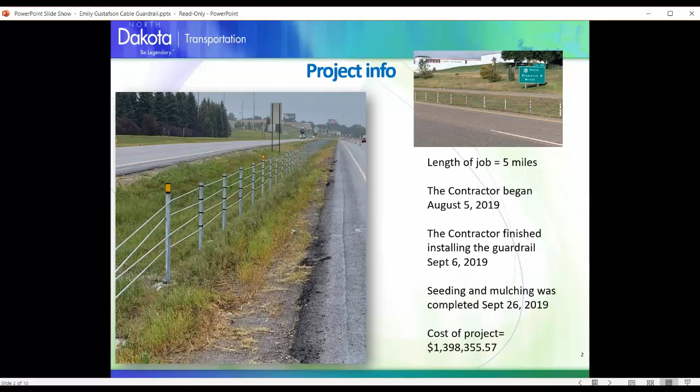In and out. There was a 1-lane closure on the interstate for that month. So, minimal impact to the public. They were still able to go 60, but it was a 1-lane closure. And it cost about 1.4 million.

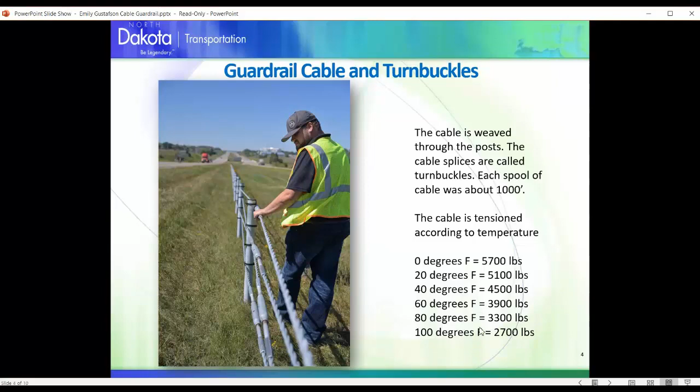Each spool of cable was about 1,000 feet. So every 1,000 feet we have these turnbuckles. And then the cable is tensioned according to the temperature outside. So it was August, it was 90-ish. So around 3,000 pounds is where we were tensioning that cable.

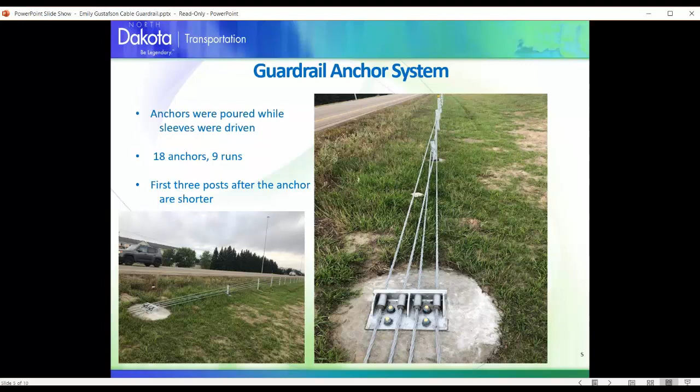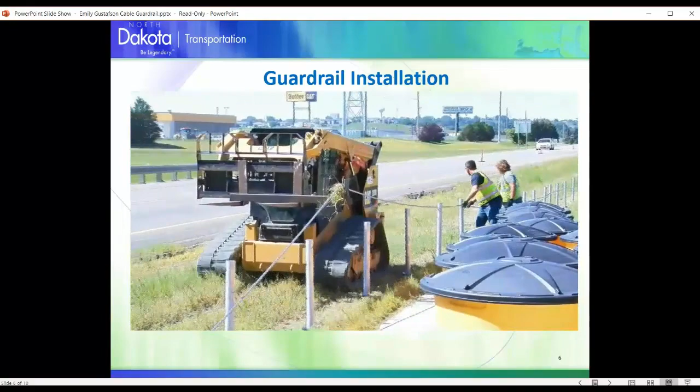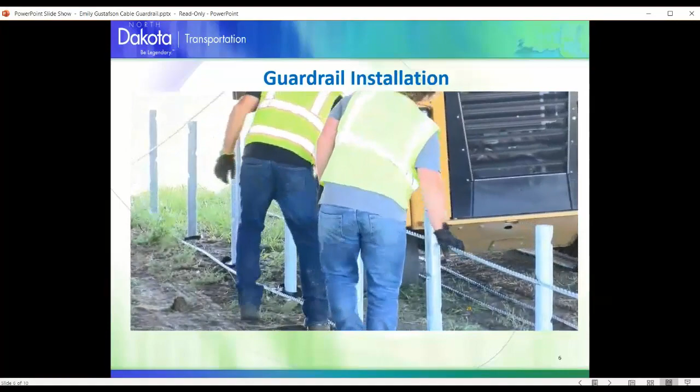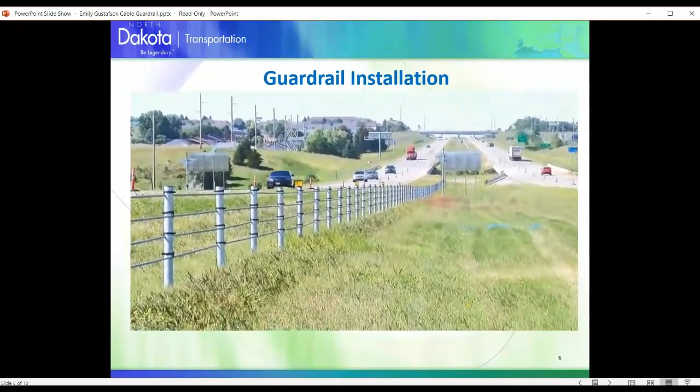This is a video. There's no audio. It's just a video that shows them stringing the cable. Okay, and then it just kind of showed a final view of the finished product.

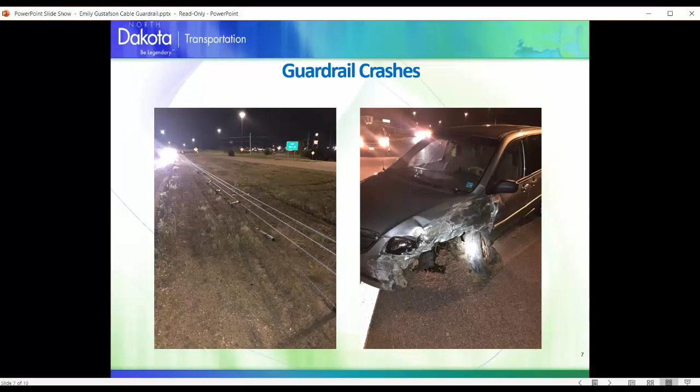The cable keeps its tension really well. It deflects a lot and then it goes back to its shape and it keeps its tension really well. We went out the next day. We have a trailer with replacement parts on hand all the time, and we had some guidance on what to do. So this was our first time going out and fixing a damaged section. So maintenance, we went out there and it probably took, I don't know, maybe like an hour and a half to fix those 19 posts.

You're never supposed to cut the cable unless it's a life-threatening situation. And if you do have to cut the cable, you try to cut at the turnbuckles so that it's easier for the splice. And so, like I said, it was pretty painless to fix it.

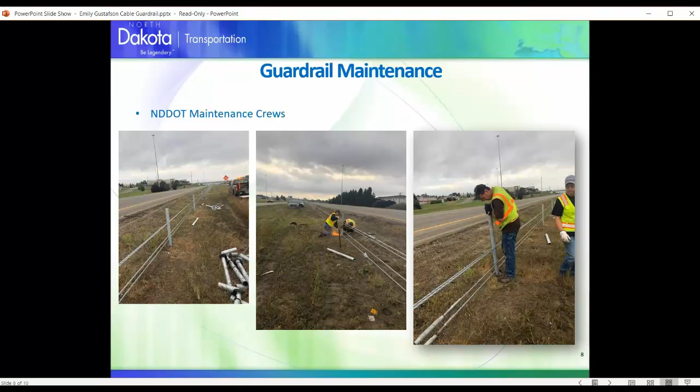I shouldn't say us because I was just taking pictures and not helping, but maintenance guys do a really good job. They're out there right away after a hit, I mean, within a day, and when they're done, you really can't tell that anything happened there. So they do a great job.

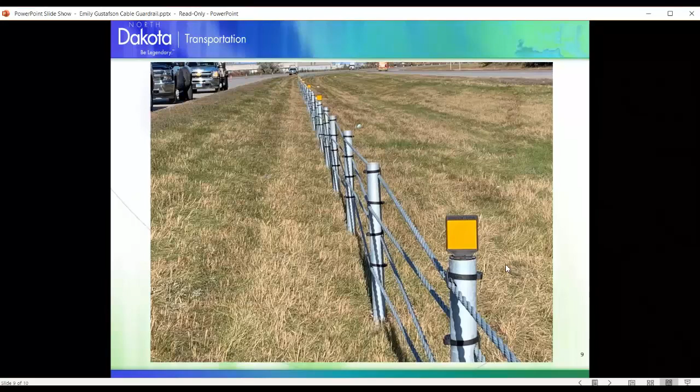And then I just have one more view of the final product. You can see the weaving, and we put some reflectors on the top. It helps at night, and then these clips kind of help keep the cable. There's a little groove in the post too where the cable sits, but the clips help just a little bit. And I think that's my last slide if anybody has any questions.

Okay, Emily, there are some questions, and I'm going to let Jordan read the questions. Okay. Yeah, the first one is, how many times has this been hit since it was installed? Well, it was hit a few times last fall, and once the project is over and I final it out, I guess I'm not really that involved with it, but I do know that it was hit a couple times this winter and a couple times this spring. So I would say less than we thought it would get hit, and definitely more nuisance crashes, like Cameron said, not serious injuries, just property damage.

Okay. Couple other questions, I guess. How deep did the line posts go into the ground, and how deep did the anchors go into the ground? I think the anchors were, I don't have my shop drawings right here, but I think they were like 12 or 15 feet or something like that of concrete. And then I think they're talking about the driven sockets. Those are, I don't know, 6 feet tall, I suppose. I think Cameron had a picture of a guy holding one, and it was a little bit taller than him, and then it goes to ground level. So I would say 6 feet.